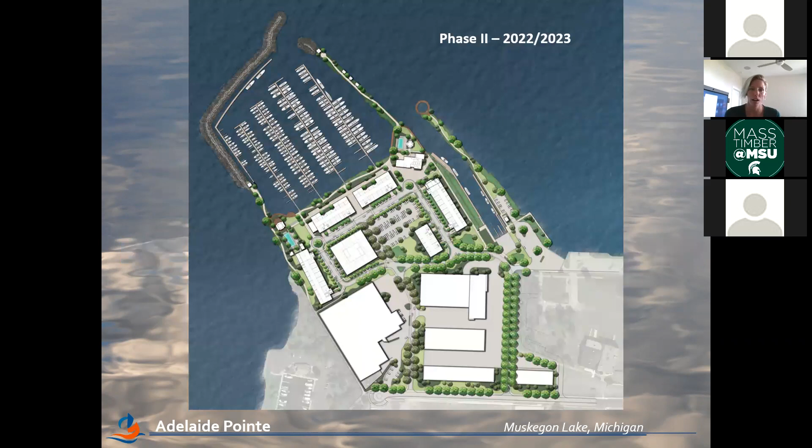Like I said, here we are in phase 2. Phase 2 is comprised both of building that marina that you see in the central basin and building the multi-use building. To the right of that, you'll see a little finger of water. That's the East Basin, which I'm not going to talk about anymore today. I'm also not going to talk anymore about the marina design or development today, but if anyone has questions, feel free to reach out after this webinar.

What I will focus on today, though, is the construction of that multi-use building, which is in the right-hand corner of your screen. And that multi-use building is really our first go-around, between that and the condo building, at really engineering and architecting using mass timber. Next slide.

So the primary architect for our multi-use building is Architectura. They're a local architectural firm, really specialized in Scandinavian design, based in Grand Haven. Really great design architects. One thing I want to point out from a developer's point of view when we're talking about mass timber is one thing that was really important for Ryan and I is to really promote the use of mass timber, not just for our development, but for the rest of Michigan. We're so excited to see so much interest in mass timber construction in Michigan.

And one way to really promote the use of mass timber in other developments is to bring local architectural and construction firms on board on our project, because we are actually now the biggest mass timber development project in Michigan. We'd like to bring a lot of partners on board to get everyone experienced in what it takes to architect, engineer, and construct a mass timber building. So it was important when we were assembling our team to bring on experts such as Korb and Associates and some of our construction firms that are really experts in mass timber, as well as bringing on some of our local architectural firms, contractors, builders, et cetera, so that they could also begin to understand what it takes to put together a mass timber building.

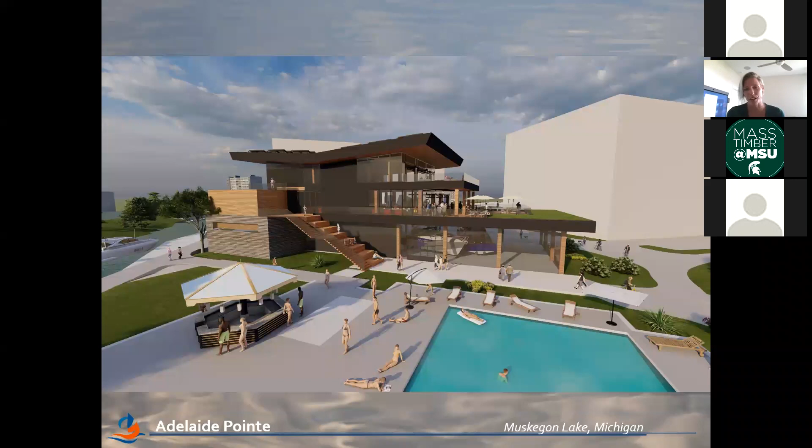So here's a rendering of that multi-use building that we're building. There are a couple changes that have happened since this rendering, but not too many. So as you can see, on the first floor is that boat retailer. On the second floor is the restaurant, and on the third floor is that event space. Like I said, I'm going to leave all engineering and architecting questions to Jason Korb, who is an absolute expert in that field. But there's one thing that I just wanted to mention about this building, because I do know that we have a lot of architects and engineers on this call.

So creating a mass timber building for a boat retailer is not easy. You need very large spans in order to get boats in and also be able to maneuver boats around. And mass timber doesn't always allow for very large clear spans. And so the way that we're engineering this building is we're using steel-wrapped timber for that first floor for those spans, because we couldn't find clear spans that were large enough for boat retailers. And I think the technology is coming along, and maybe some of you know more about that than I do. I'm really encouraged by some of the things that I see.

And I'm excited to learn more at the Mass Timber Conference, actually, because I think as we start to develop these buildings for what would be considered non-traditional uses, such as industrial, it's important to start thinking about how we can use mass timber in larger spans in order to really accommodate some of these non-traditional uses for structures. The second and third floor are all comprised of mass timber, except for the kitchen of the restaurant. Of course, we need some concrete in there. Next slide.

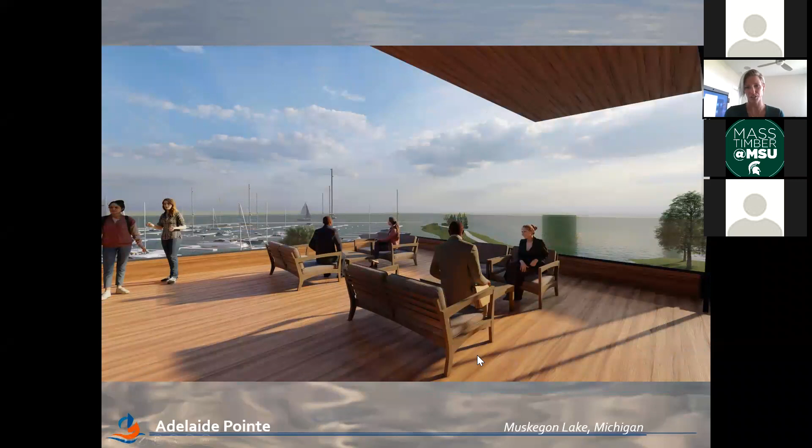So here's just another image of right here. You're looking out over the second floor of that restaurant, looking out over the marina. And in addition to, of course, the history of the site using mass timber and the environmental sustainability of mass timber, it's also just aesthetically wonderful.

There's a lot of research coming out showing the positive effects of being around natural spaces. And that's one thing that we also want to educate the public on, is just, mass timber, in addition to some of its environmental benefits, is also really beneficial for you psychologically. So it's just a really beautiful space to be in. Next slide.

Here's just another rendering. So you can see here that in addition to the mass timber building, we're also, you can't see this here, but on the roof of that building, we're installing solar, like I mentioned before. And we're also using some green roofs. So in this case, the green roof will serve for both environmental purposes and also be a wind barrier actually for that restaurant.

We also really in the design really wanted to promote the indoor outdoor use, the aesthetic of how you bring the outside in and the inside out. So that was one thing that was really important in the design of this building. So we used a lot of windows and garage doors, things like that in the design of this building, which I think turned out really beautiful.

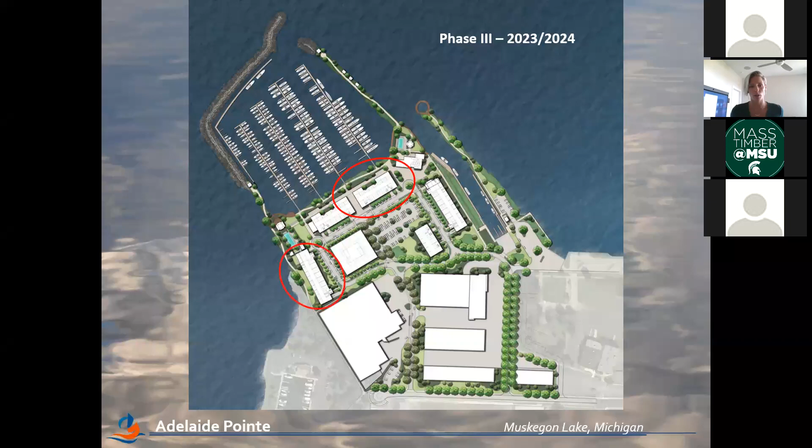And now here we are. This is phase 3, which will start in 2023 and go to 2024. What's circled right now is that potential hotel. That's not finalized right now, so I don't want to really discuss it, but we're really excited about that opportunity. And in addition to the hotel is that long building on your left, which is the first condo building, which Jason Korb is going to talk a little bit more about now. So I'm going to kick it back to Sandra, and then we'll hear a little bit more from Jason about some of the engineering and design behind that first condo building.

Great, Emily. Thank you so much. I thought it was a very clear and inspiring presentation about the vision for Adelaide Pointe, and it'll be extremely enjoyable to dive into the nuts and bolts of the design, architecture, and engineering of these mass timber buildings with architect Jason Korb of Korb Architects.

I did want to flag for our audience that Jason and Korb Architects are the architects of the Ascent Tower in Milwaukee, which is going to be, at least until another one comes, for a time, the tallest mass timber structure in the world. So very excited that that will be right across Lake Michigan from us here in Michigan. So hopefully a field trip is in our future.

Sorry to interrupt you, but I just want to say one thing before Jason introduces himself. We looked up mass timber architects when Ryan and I first decided to build with mass timber.

And we found Jason's name through the Ascent building, as Sandra mentioned. And we thought this guy really knows his stuff, right? Since it's the tallest mass timber building in the world. And only later did we find out he's just a ferry ride away in Milwaukee. So we literally hop on a ferry that's based in Muskegon, go two hours across the lake, and there's Jason. So it was kind of fate to have him on the team. It's pretty great, and I love that connection across the lake.

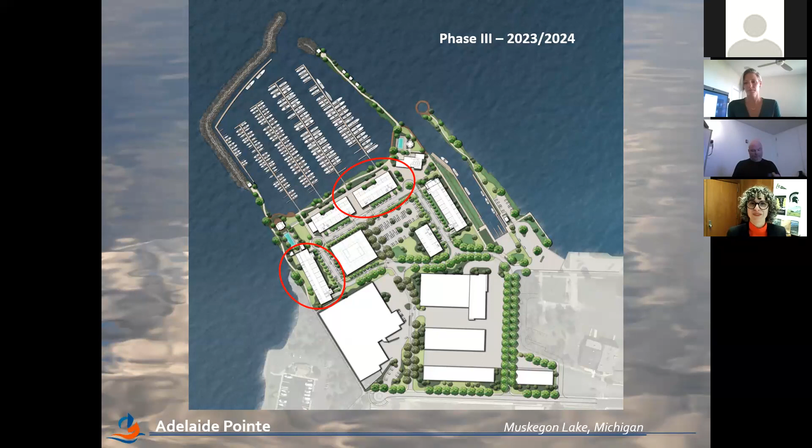It's Jason Korb, KA, here to talk about the first residential building at Adelaide Pointe. So a brief overview of our firm. We're about a 21-person architecture and interior design firm located in Milwaukee, Wisconsin, but we work all over the country, increasingly so in the mass timber space.

So when we met with Emily and Ryan Leestma, just under a year ago, they presented us with this spectacular site on Muskegon Lake, surrounded by water on three sides. And really, these are the parameters that we ultimately landed on. It was imperative that every condominium unit had expansive water views, which led us to produce a single loaded corridor building, which is a little bit unusual, but it was the right solution for this site.

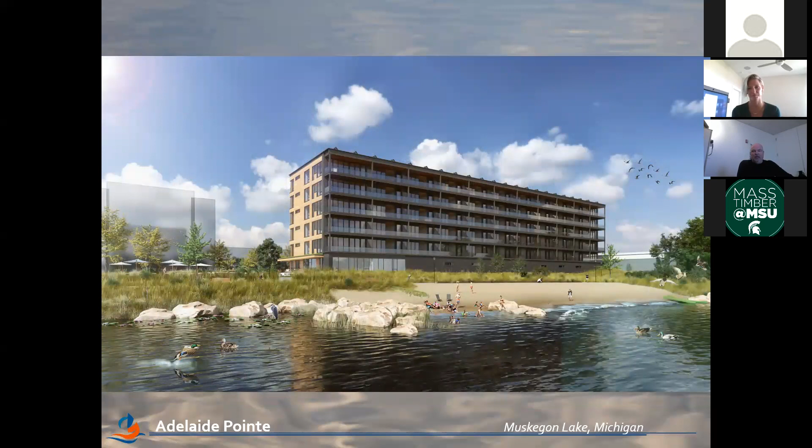So again, this building was really designed inside out. We're looking at the building from the water. What you can basically see is the entire exposure of the building facing Muskegon Lake is, A, operable glass, and B, continuous terraces. You can't see it very well, but there are frosted glass dividers between the terraces for privacy. Each unit has its own private balcony facing the water, and they're about 28 feet on center, so functionally 27 feet clear.

And then the north wall of the building, where you can see some wood cladding, is the end wall of the 3-bedroom unit that is exposed on 3 sides. The glass in the ground floor is the party space and fitness center, again overlooking the water. The more solid wall to the lower right is the enclosed heated parking. If we could take the next slide, please.

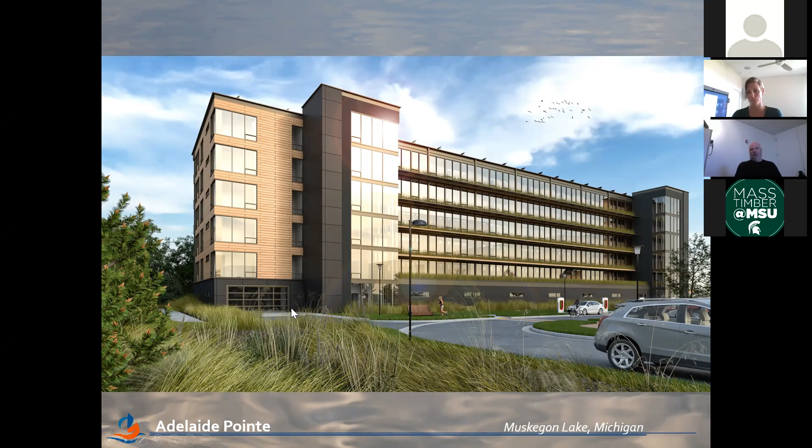What you'll start to see, and we'll dive in a little further on this, is the corners of the building as designed today is where we would start to see more glulam. So the corners of the 3-bedroom units, to fully capture these views of entirely glass, are supported by glulam columns and beams. And again, we'll dive into that a little more moving ahead. Next slide, please.

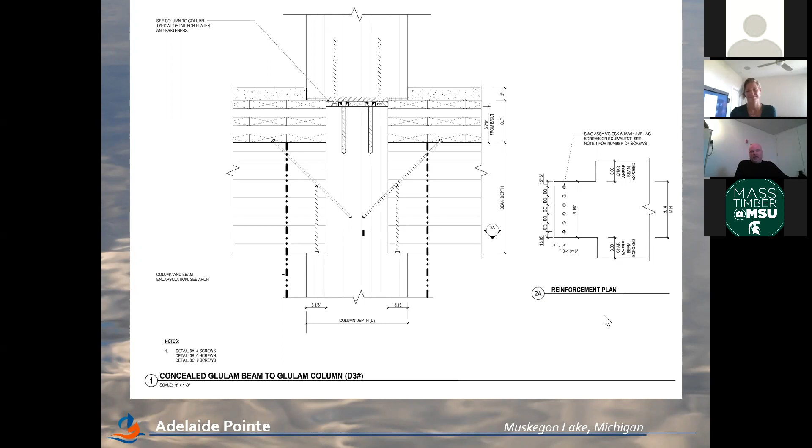One of the advantages of mass timber is the speed at which it goes up is sort of unprecedented. So again, at the end of it at Ascent, we were doing a floor every 5.5 days. And that was a 17,000 square foot floor plate. So it's about half the time of a concrete floor of that size. Next slide, please.

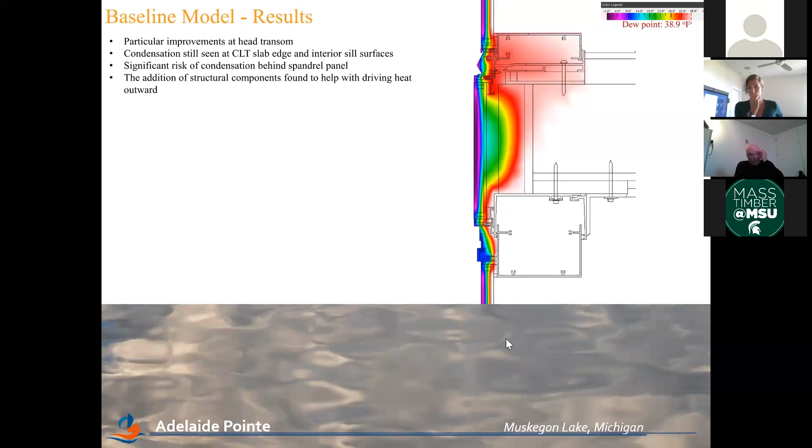And so in these window wall systems, we basically worked with the manufacturers and with a facade engineer. And if you go to the next slide, by the 6th iteration of window wall, you can see we came up with an insulating gasket detail and a spandrel detail that kept the dew point well away from the cross-laminated timber. So this is a slightly different kind of analysis that you have to do in a timber building. Again, the wood is physically protected, but this is sort of a belt and suspenders approach.

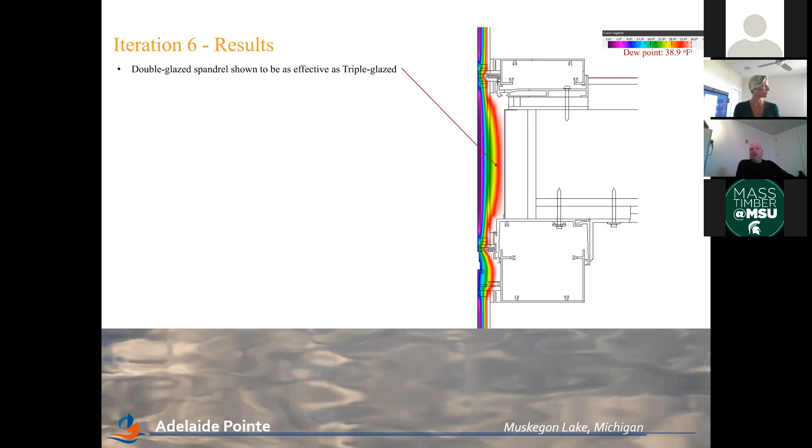Again, we have very high winds coming off the lake at certain times. And so our other consideration in this, aside from temperature, is wind-driven water. And so we had to be very careful about how we get water out of this wall system. We have a saying in the industry, water always wins. It will get in, and it only becomes really problematic if you don't give it a way to get out, which we have done here. So next slide, please.

Because every hole is pre-drilled in the timber down to a precision of about 3 millimeters. These are drilled in the factory by a CNC machine. In this particular project, we won't have as many as at Adelaide Pointe, but we'll have a lot, where we are coordinating every piece of infrastructure that lives above the ceiling. Because this model gets fed, when we have a manufacturer, to their CNC machines for production. This model is actually used to fabricate the timber.

And so one consideration in mass timber is that there is a lot more coordination that happens ahead of construction, but it more than pays for itself during construction in terms of both speed and ease of construction, because there's no hot work, because everything is pre-drilled, and they're really just assembling a kit of parts that's already ready to receive the components by the time the trades are on site. So it's paid dividends. It's a little painful up front, but again, it more than pays for itself.

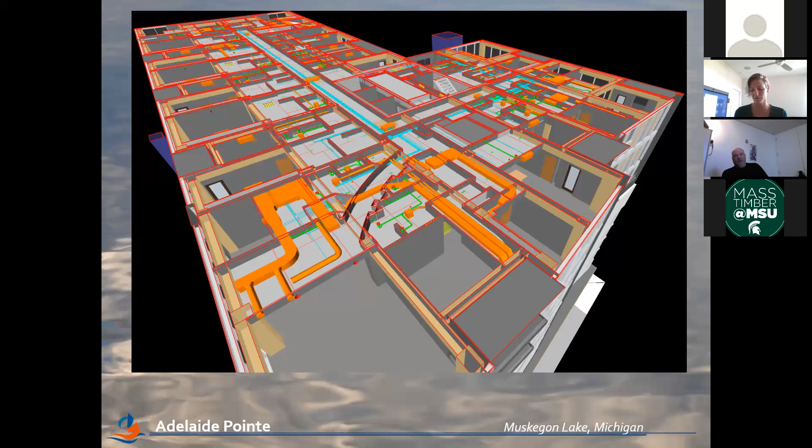So next slide, please. And here we are, I think this is the last slide, just a kind of a summary of the project. And we are through kind of schematic design and are thinking about advancing the documents for a hopeful, Emily, spring of '23 groundbreaking. Yes. Yeah.

And just thank you, Jason, and thank you, Emily, for your presentations just now. I have talked with you both numerous times about this project, and I just learned a whole bunch more about it. There's always something new to learn, and I'm sure that our audience, which includes a lot of folks from the AEC industry, as well as others, have learned a lot as well. And we have some questions that have come in. And I also have a question that I want to start with for Jason.

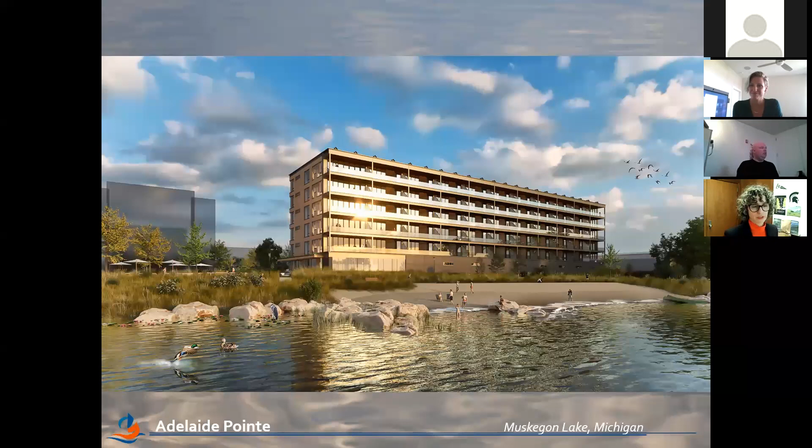And with ownership, we sort of collectively decided that A, 55 units is a good way to test the market, and B, 6 stories is plenty tall for this site. So I just wanted to throw that out there as well. I'd forgotten to mention that. Yeah, I think it's really helpful for the question that I wanted to pose related to the building codes too. So there's a perfect segue. So I'm going to go back to the Ascent Tower pic just so it's there while we're talking about it.

As you said, Michigan is currently operating the Michigan 2015 building code that reflects the 2015 International Building Code elements that relate to mass timber. The state of Michigan is currently in the process of updating a draft based on the 2018 International Building Code, which does include some updates to mass timber related codes.

There's a number of stakeholders in Michigan, including Mass Timber at MSU, that's been talking with the state about, while this 2018 rulemaking process is open, why not incorporate by reference the 14 new mass timber elements that the International Code Council adopted in the 2021 International Building Code, which allow you to go taller, allow more mass timber to be exposed, et cetera. I'm not going to dive into the nuts and bolts of that. That's another webinar. But we're hoping to see that happen here in Michigan.

And I had an opportunity last week to talk to the Secretary of the Wisconsin Department of Safety and Professional Services and some of her team who came to visit our STEM facility here at MSU, the first mass timber structure in Michigan, to talk about building codes and other things. And I learned that that department, which regulates codes in Wisconsin, has already sent up for approval to the governor, and then it would go to the legislature in that state, a package that would adopt those 2021 mass timber elements from the International Building Code.